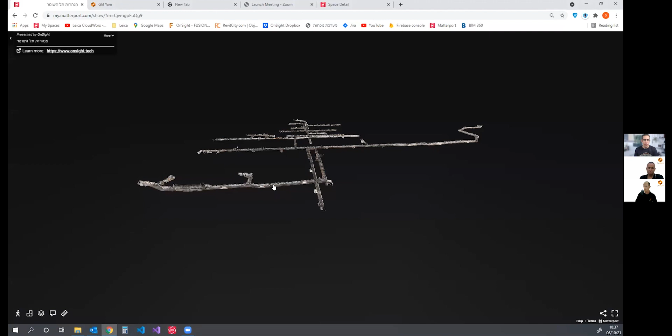Okay, let's check this out. So you can see the model, right? Yeah, I can see that screen. So as you can see in my screen, it's a 3D model of a big tunnel in Israel, an underground tunnel in a hospital, under a hospital in Israel. It's 3.5 kilometers of tunnel. We scanned about 500 scan locations in this specific tunnel.

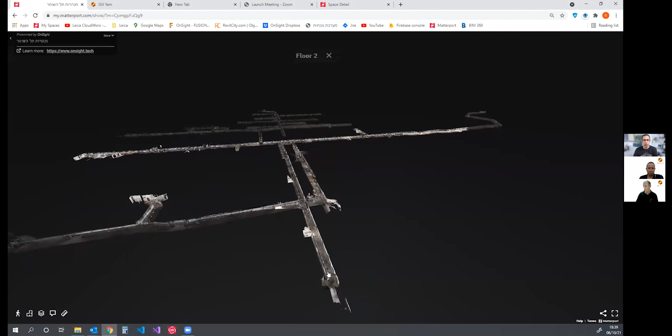I will dive into the tunnel. The main purpose of this capturing was two reasons. One, to generate the point cloud. We did this capture using also Matterport technology and laser scanning. So one reason was to create a digital twin of this underground tunnel using the point cloud.

The other reason was to enable the end client to have clear access to the tunnel, to be able to add annotation tags, to identify each element in the tunnel, to plan each and every change that's about to be made in this specific tunnel.

And there were a lot of changes that occurred in this tunnel from the day that we scanned, about 2 years ago. So this was our first, I think it was our first project using the Matterport Pro 2 camera.

And this was a big one, a huge one. It took us about 5 days working in the field. So it took 5 days of coming back to the tunnels and continuing scanning every day, more scan positions, adding on to what was previously captured.

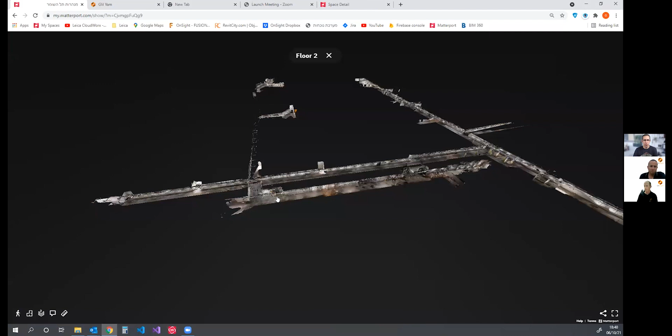Yeah, exactly, we used the April tags for the registration. As you can see, we might see in the walls sometimes here the April tags. Yeah, this is a challenging environment because of the repeating architecture for sure. Although there are a lot of objects like the AC units and all the pipings and the boxes, but still we use the April tags.

So this was our first challenging and biggest project that we did in Israel at that time. This is an impressive project, especially for the first one, right? How did you, with pretty much no experience under your belt scanning with Matterport, land a job like this? Is this connections that you previously had, or did you just run into this situation?

Okay, that brings me to the other side of OnSight. OnSight established, as I said, 3 years ago, and very soon as we established OnSight, we were contacted by a big firm in Israel, a surveying and mapping firm. They're called APINCAS. They do all kinds of surveys, from drones to terrestrial surveys to underground surveys. And this is how we received this specific project. It's a huge one, a huge client, a specific hospital in Israel that does a lot of projects with us today. So we do a lot of projects coming to us from this specific surveying company.

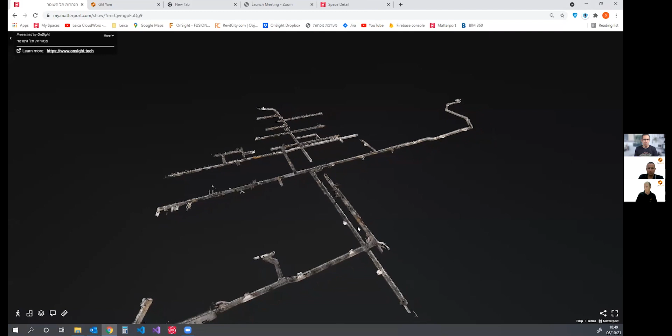Right, I mean this is for AEC purposes, so we're not promoting it, so there's not as much concern with every different low-end computer trying to manage this, because I imagine this will be difficult to get through. So this is more for measuring and understanding what's going on here before anybody comes in and does any kind of construction work.

Yeah, we also separated this model. You see now the entire model, but we also separated it in the field into 5 pieces. Then in the office, together with Matterport support, we had to combine all the pieces into a single model. Yeah, it's a very time-consuming process for sure.

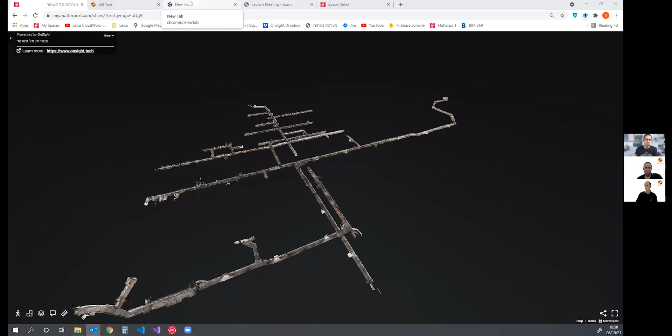So I definitely want to look at the other model that you were mentioning, and get to better understand that use case and how it's being used. So what you see here, you can see my screen with this floor plan, right?

Yeah, so what we did here is capture, with Matterport, about 15 or 14 different buildings in a complex building in Israel. Each building is about 10 to 12 floors.

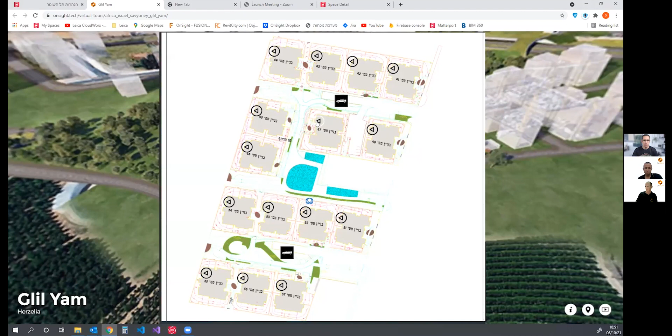We organized all the buildings into one nice floor plan to give the client a nice view of the site and ability to access each space separately. This is a simple way for them to navigate into different models. They can see the entire campus, if you will, of different buildings. And this is one of many buildings.

So here we have, it's in Hebrew. We will have 11 floors and 2 minus floors, so it's about 12 or 13 floors overall in the building.

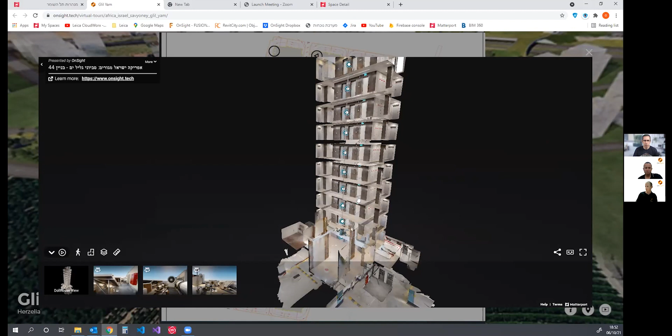As I said, the challenges in scanning and capturing this kind of building is if the building has multiple staircases. Once we have multiple staircases, we need to pay attention to different details in the site. We need to work bottom up, beginning our scanning from the minus floors to the highest floor.

Basically, we divide such buildings into pieces. In most cases, this specific building is 11 floors, or 13 floors if you take the underground floors, so we divide it into 2 pieces. Then with the ability of Matterport services and support, we combine and stitch the 2 different spaces into one piece. That's the main challenge we tackled in these specific buildings.

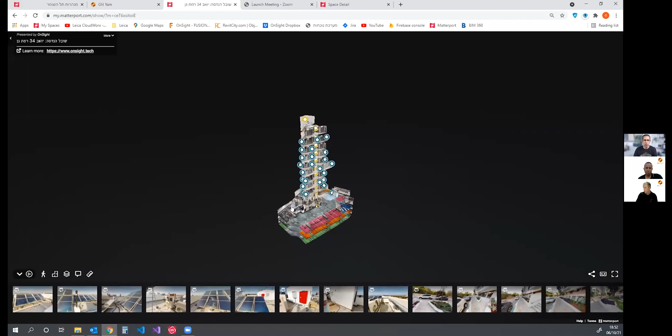This one specifically has only a single staircase, as you see here. I'll try to open a different model. I think this one has more than 1 staircase, but I'm not sure. This one is very similar to the previous one. I think, no, it has only 1 staircase, so it's a little bit easier. I can show you later another sample with 2 staircases.

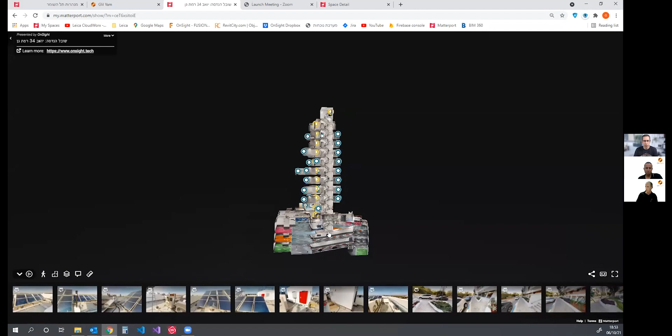This specific model contains also the parking lots underneath the building. And you can see the matter tags taking the client to each and every apartment in this building, if I hit the matter tag.

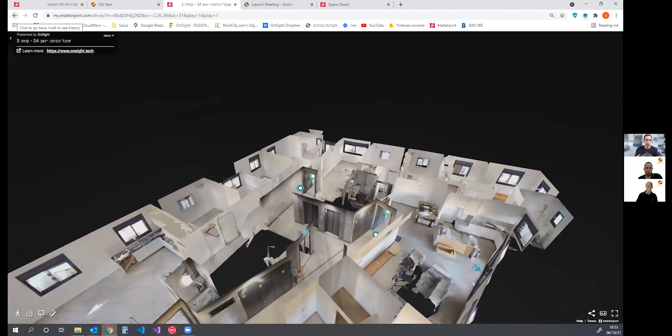So not only do you have the building from the inside, but you also went in and scanned all the different apartments as well? Yeah, correct. In this specific building, I don't recall the exact number of apartments, but it has above 20 apartments that we scanned, and they are all connected to each and every building.

And from the apartment, can you go back into the building? I wanted to say that unfortunately no, but yeah. I see, you got the link there. Yeah, so you can go back.

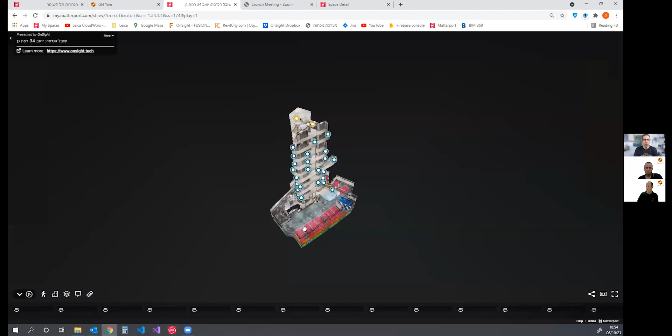And you've provided a lot of exterior scans as well, looks like, and the highlight reel. Those are 360 views, yeah. We generally have the client request us in each building like that, but we also have a 360 capturing of the ceiling, the top roof, and the surrounding area.

So we need to take the camera because of the sun limitations and other stuff. We need to generate the 360 views on the roof and around the building. So yeah, this is the highlight reel below.

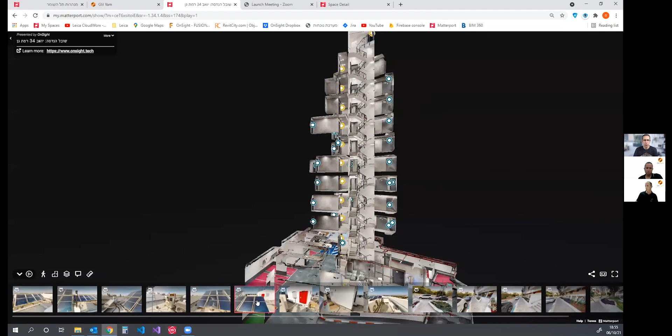So what you're saying is these companies hiring you need this documentation as a kind of insurance, proof of the current state of this building from every different angle. Before they hand the keys over, after having built it, they pass the building on to whoever bought it, the real estate company, so that they can come back a year down the road and say, this huge scratch down the hallway is how it was when it was built, and you need to fix this.

This company, the builder, can then look at this documentation and say, no, actually somebody moving a piano into their apartment caused that scratch, not us - when we gave it to you, it was tip-top. Correct, that is exactly the case, and we already received many feedbacks from our clients that they use the 360 captures against those tenants.

How long does it take to capture a building this size? So this has the 3 parking floors down below, and you said something like 9 levels with apartments, maybe a lobby in there. So we're looking at 12, 13 floors total. How long does something like this take?

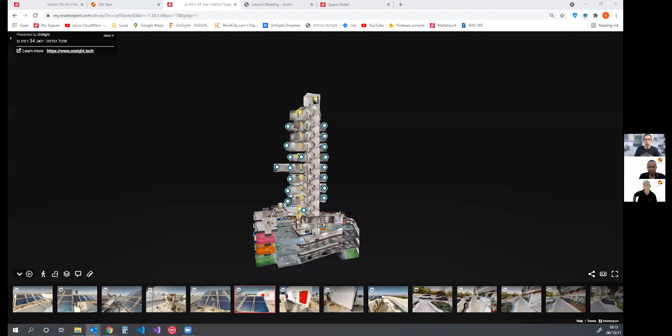Should we? I did see a question zip through here before we get into the full questions and answers in a minute. How many scan positions is a building like this, like what we're looking at? Excluding the underground parking part, it's about 200 to 250 scan locations. Okay, that's reasonable, I would have expected more. Yeah, each floor with the floor staircase consumes about 15 to 20 scan locations per floor, with the stairs upstairs. Including the stairs? Yeah, including the stairs.

Can you go into one of the floors so we can have a look at it? I will take a more general one, I will take this one. Okay. So we can count now together: 1, 2, 3, 4, 5, 6, 7, 8, 9. Got it. And if I get back to the staircase. And you go back to the staircase. Yeah, 10, 11, 12, let's say, 14, 15, 16. It's about 20. Yeah, 20 per floor, including the stairs.

Great, okay. So we've got about 15 minutes left. These scans are just really impressive. I love looking at them, and I can completely understand how this would be of a lot of use for a company, especially looking to insure the asset they just built.

So, okay, yeah, I can say also that we're still trying today to always proceed and enhance our deliverables to improve the service. We try to collect more feedback from our clients to understand what they need more for us to implement in these specific tools. As you can see here today, we only implement the matter tags, sometimes we put other data received from the client. We try to understand today what else the client needs from us to drag into the 3D model.

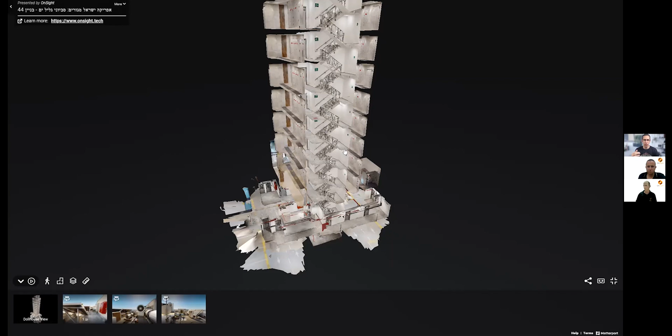And just to mitigate the risk of pancaking or merging of floors, that's why you break it up into multiple models? Yeah. So everybody knows, yes, there's that risk of having merged floors, especially in models like this classic example, because the staircases in any tall building like this, with fire escape style staircases, are identical from one floor to the next. There's very, very little that differentiates between them.

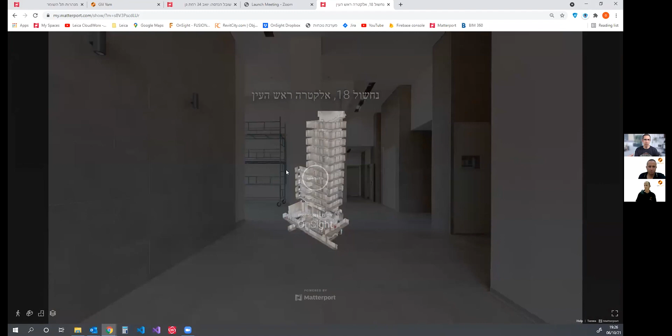What we've found, working a lot together during these scan processes, is that scan density makes a huge difference. The number one way of preventing pancaking or merging floors in this type of building structure is increasing the number of scans in the staircases. In the hallways that's one thing, but in the staircases it's absolutely critical - you want a scan every 3 steps. If you start skipping and doing much more than that, you could end up with a merged floor. It's one of those issues you can't really see as you're scanning - you can't tell it just happened, because across the XY axes, the placement and capture looks correct, but it just dropped by 3 meters to the floor below. That's when you get that pancaking and merged floor issue.

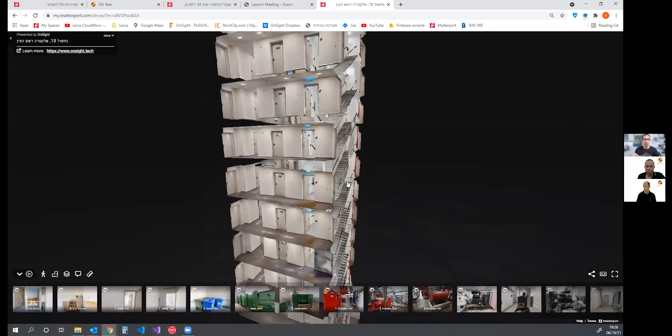This building you're showing right now has that double staircase you mentioned before, and this is a very, very complicated scan technique. What did you find was the best way to approach a building like this, scanning both staircases?

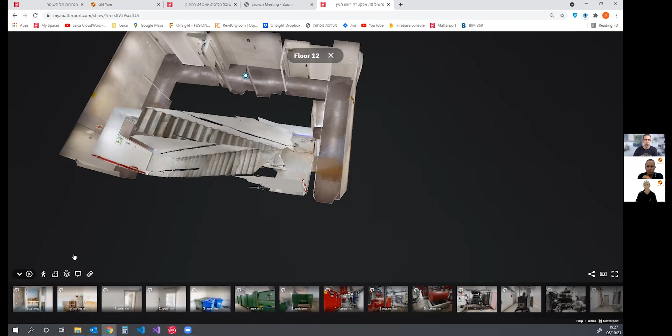Yeah, we had some methodology that we developed in-house. First of all, to scan bottom up, beginning from the lowest floor to the highest one. I need to show you on a specific floor how we approach these multiple staircases.

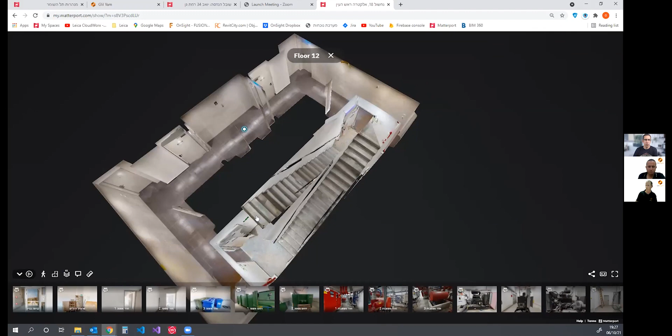Basically, we go over the lobby, go up on a single staircase, and go down the other staircase. Let me check it on a different floor - no, that's not a good one. So when you say go up and then down, you're talking about a single path of aligned scan positions - you haven't broken the path yet, right? You go up one and then down another?

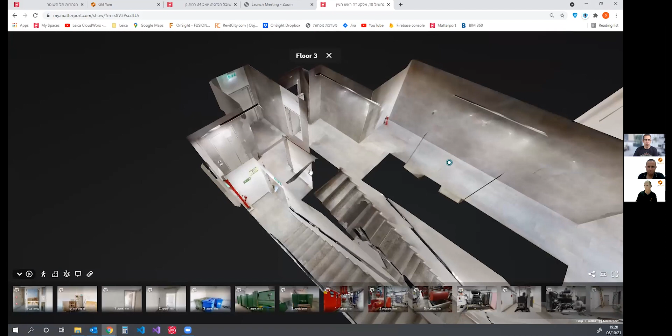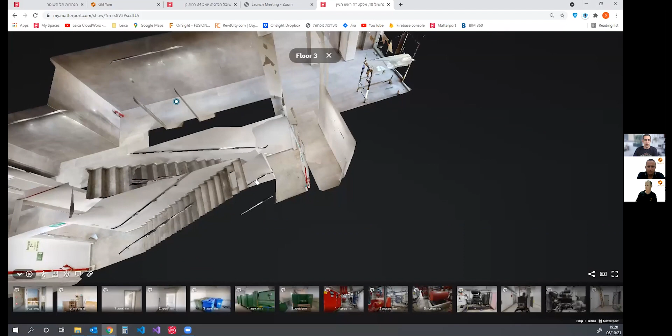Yeah. So basically, I go up this staircase. Once I reach the second floor, I open a new floor on the iPad. I go down, get back to the first floor, begin to scan the lobby or public space, reach the second staircase, go up it and stop on the last stair - because I already opened the new floor from the other staircase, so I can't open a new floor here as I did in that area. So basically, we found this to be the best approach for scanning these kinds of spaces.

Sometimes we do use the April tags also in these multiple floors or multiple staircases. But yeah, that's the basic of our scanning methodology.

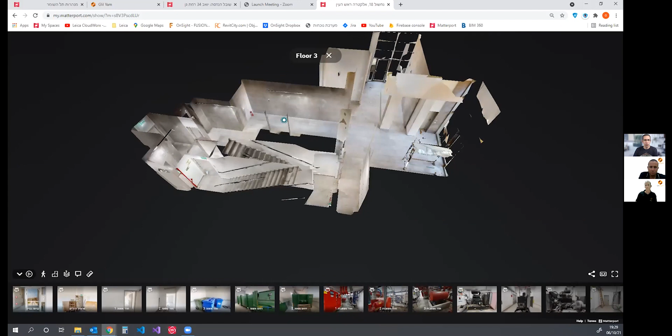So, up one staircase, create a new floor when you get to the top, and then you go back down the staircase that's right there, without breaking the path of alignment. You're going down the stairs, then when you get basically back to the floor that you started on, but at a different side, the opposite side of the building.

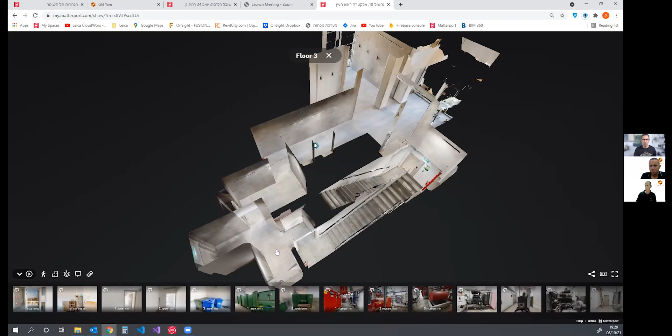Did you say that you change back to lower level? Yeah, so you go back to the lower level in Capture, scan that entire floor back around to the beginning, kind of where you started, essentially. Correct. Got it. So you do like this up, down, and then all the way around.

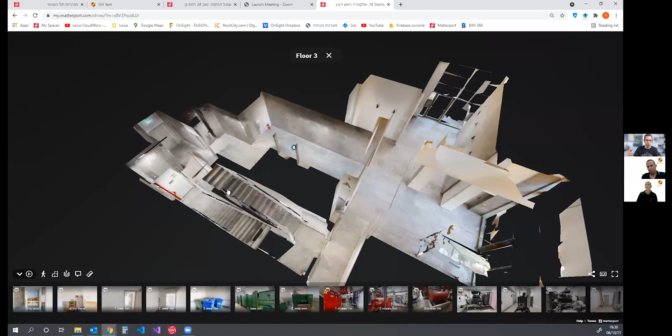And then what? Then you pick up the camera at that point, go a floor up and do the whole thing over again? Yeah, exactly. Okay, so that's where you break the path of alignment—once you've made the complete circle all the way back to where you started, then you pick up the camera and go up a floor and just do the whole thing over again. Yeah, that's the basic process.

Very good. Let's see here. We had a question from John: April tags do not fully hide, in my experience. I'm not sure, John, what you mean by fully hide. Yes, if you're going to use April tags, there's no way of hiding them or making them go away in terms of the visual. You're going to be able to see them.

And I think in this use case, it doesn't really matter, because, like we said, it's not for promoting the building, it's more for an insurance document. So be mindful if you are going to use April tags. You're not hiding them. There's no way of erasing that from what the camera saw. The camera's just using it as a registration, a way of more easily aligning between one scan and another.

Bob asked, what hardware, like iPad, what iPad or iPhone? I'm not sure which one of those you're using. I know some iPhones today are very strong and can definitely be used in place of an iPad. What iPad are you using?

Let me check. I think it's the iPad Pro, definitely—the iPad Pro, 11 point something inch. I don't recall the exact size, but the iPad Pro. We're not working with the iPhones at all in these specific spaces. Got it. Yeah, so the problem is, an iPad Pro—they're phenomenal devices, very, very strong, and can do quite a bit.

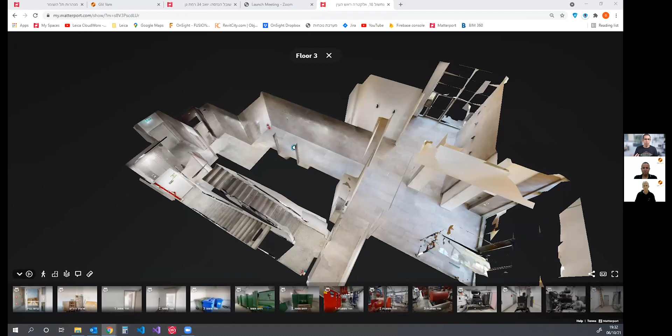In this case, we're not talking about a manufacturing plant that has 50,000, 70,000 square feet on a single floor. It's really just 20 scan positions, so you wouldn't really need even that strong of an iPad. I'm not saying you shouldn't get it—you should definitely always get the strongest iPad that you can afford. But it's not so critical in this particular case with these buildings that we're looking at.

It's not so much about the horsepower of the iPad itself, but the problem you're going to run into if you start accumulating so much data, with 3, 4, 5, 600 scan positions, is the Matterport processing engine and its ability to process all that data. That's where you might run into problems. And then if it does get through that—and it should—it could start taking longer and longer. Models get processed for 24, even more hours.

Then the question is, what's your use case, and what computer is looking at it? The reason I say use case is because if it is a promote use case, you want everybody with all different types of computers and web browsers to be able to see and more easily navigate through the model. In this case, that's not it—it's not promote, so it's really just for a handful of people to look at. They can be a lot more in control about what types of devices are presenting the showcase and looking at it, to maintain that smoother navigation experience.

Okay, this is the triangle building that you were referring to. Yeah, 42 floors. Let's have a look at this—this is a very, very impressive building.